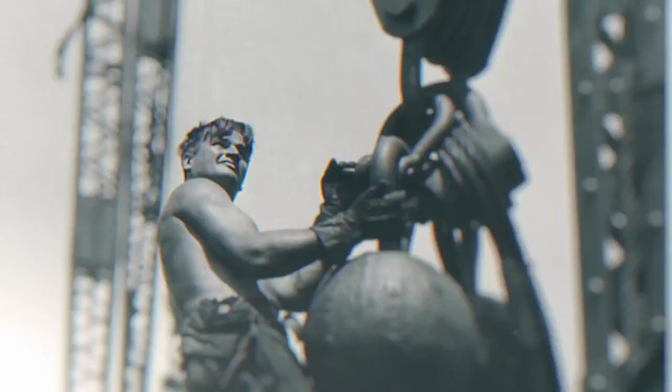Like giant exclamation marks, skyscrapers punctuate the story of our urban development. People always want to reach—there's something heavenly about it, and people have wanted to race for height forever. Developed by the pioneers of architecture in the late 19th century, they were, at the time, the equivalent of our going to the moon. These magnificently designed tower giants urbanized some of the greatest cities in the world. It's about defying gravity and leaving a sign of humanity. From Chicago to London, from Tokyo to Dubai, skyscrapers have and continue to define our contemporary way of life.

The 1970s was an era of pivotal change in the United States. After a decade of optimism and prosperity, the country was now suffering through an economic crisis. The economy was in recession, and cities like New York saw a decline in manufacturing, and with it, fewer industrial jobs. By 1974, 500,000 people were out of work, and the city was on the verge of bankruptcy. Demographics were also shifting. With crime rates at an all-time high, middle-class families began to abandon the city.

But out of the ashes rose the World Trade Center. Spearheaded by David Rockefeller, the urban renewal project was intended to help revitalize Lower Manhattan. The World Trade Center site and the Twin Towers, ironically, was really the first time where a government agency participated in a large-scale skyscraper development project. The idea was to give a sort of a shot in the arm, because they had this large site and were interested in projecting New York City on the world stage. The Port Authority decided to build the Twin Towers, the world's largest buildings at the time.

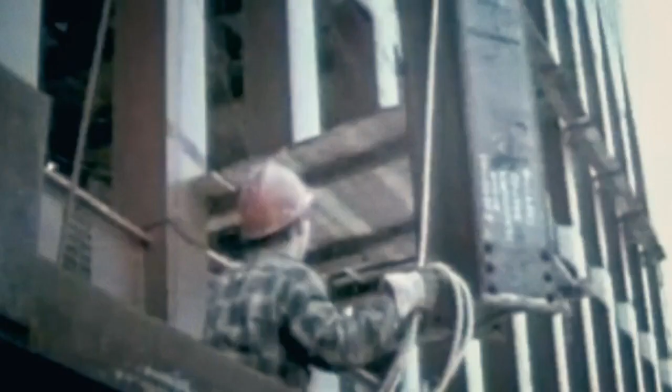At 1,368 feet and 1,362 feet respectively, the World Trade Center assumed the title as the tallest buildings in the world.

The World Trade Center site is very large, and many small mom-and-pop type shops were displaced, so that whole neighborhood, which was a bit gritty but still vibrant, was destroyed. That caused a lot of controversy. Many New Yorkers, as is typical for new iconic projects, thought those two buildings were pretty ugly. They didn't think it looked like a building. It didn't have a crown. It didn't have the typical physique of a skyscraper. The fact that there were two of them made it marginally better, but not great.

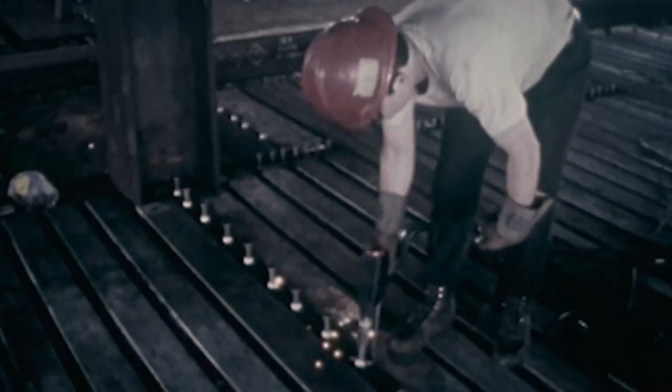Even though the World Trade Center received criticism for its generic design and brutal scale, the towers contained many innovative structural engineering features. It was one of the world's first tall buildings to use what's called a framed tube system. A lot of the structures placed on the outside of the building were columns in very close proximity to each other, just a couple of meters apart, all pushed to the edge of the building. What that did is it made the floor plate open plan, allowing businesses at the time to thrive.

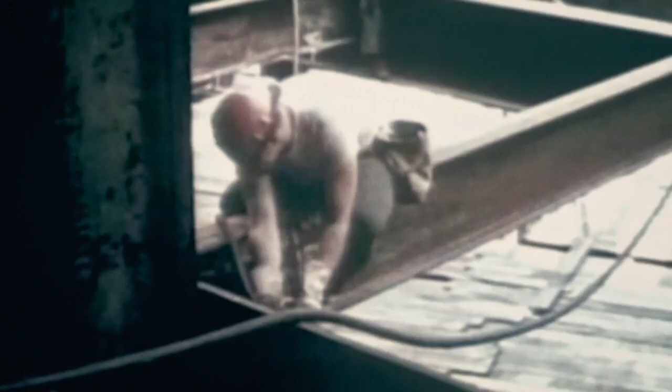The other innovation of the World Trade Center was the pressure equalized facade—a facade able to control the weather and keep it outside of the building by equalizing wind pressure inside the depth of the facade system. It's a very clever approach that controls waterproofing by opening gaps in the facade. It was a test bed for the first time of two very important aspects: wind engineering and pressure equalization of facades, both happening in that one building.

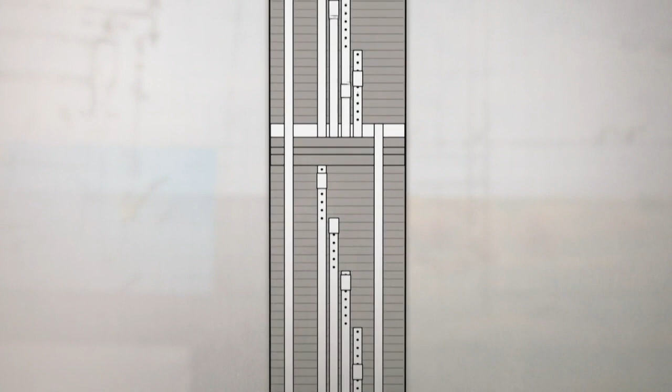The building was one of the first to use what's called a sky lobby elevator system. Occupants would travel on shuttle elevators to an open floor, and from there move to local elevators which serve individual floors. That made the whole vertical transportation process much more efficient, and it meant the core was much smaller.

New York has always embraced these vast projects with a mix of disapproval and approval at the same time. They were a little bit like aliens in the fabric of downtown, and they seemed to tip the island a little bit over to the west side. They didn't participate in the shaping of the skyline. As the need to build taller and stronger was increasing, the relationship between architect and engineer was changing.

From conception to completion, it takes a village to build a skyscraper. There was a huge number of people involved in designing a skyscraper—it's a very complex machine. You may have a lead consultant that can offer all the services, or an architect that will bring an engineering team, so you may get 20 or 30 different stakeholders within the design team. An architect doesn't need to know as much about structures as a structural engineer does, but needs some understanding so they can design better and communicate with the structural engineer better, and vice versa. The job as a skyscraper architect is to listen to everyone, synthesize what they are telling you, and channel that into the design.

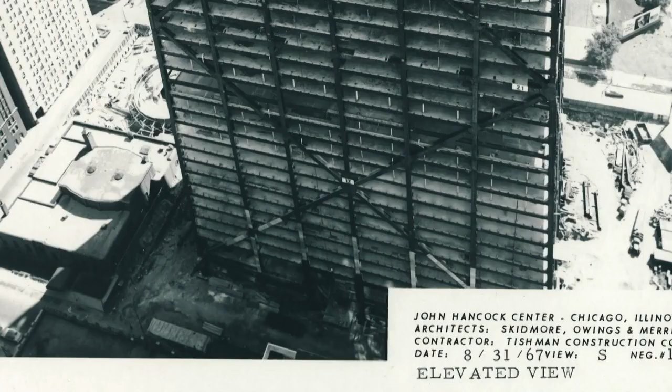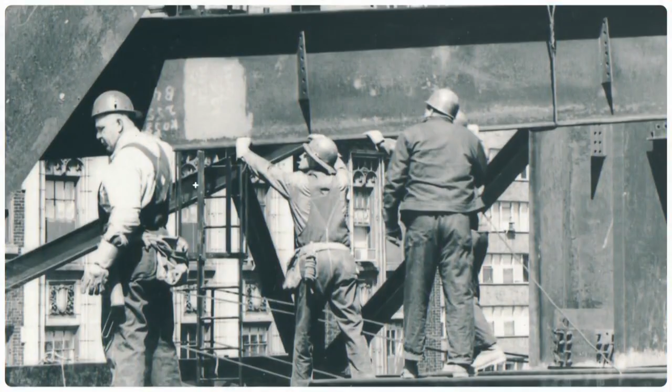We do architecture with a capital A and engineering with a capital E. It's pretty rare, and the three people, Skidmore, Owings, and Merrill, have long since passed away. So you have a bunch of people, architects who like working with engineers who like working with architects, and who are not so driven as to get their name on the door, but are driven.

Bruce Graham and Fazlur Khan were SOM's dream team in the late 1960s, early 70s. Their greatest collaboration was the 110-story Sears Tower.

In the 1970s, you had the kind of competition between the Sears Tower, the Hancock Tower, the World Trade Center, the second boom of the American skyscraper, with these latest generation of towers competing to be the tallest in the world.

Chicago has always been a pragmatic city, fundamentally, and I think architects in Chicago have maintained a very pragmatic approach. While designing the Sears Tower, Graham and Khan determined that the framing structure traditionally used to construct tall buildings was inefficient. So they opted to devise their own.

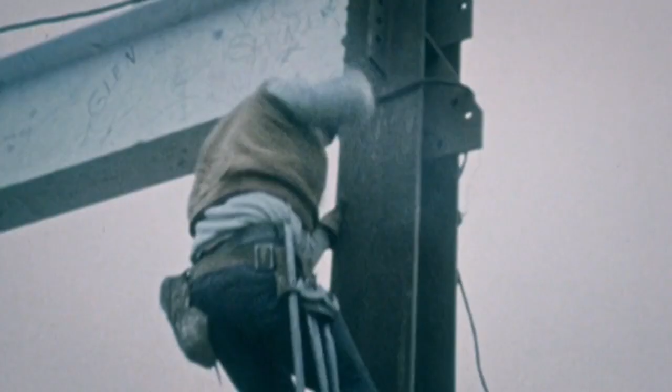The bundled tube system increased buildings' overall stability, eliminated internal wind braces, and maximized usable interior space. It consisted of numerous narrow cylinders bundled together to form a thicker, more substantial structure.

Sears Tower pushed engineering and aesthetic expression of the tall building in certain directions, and certainly with structural expressionism, the idea of expressing the structure on the exterior of the building.

I have 4 pieces here and 4 pieces here, same size and same length. So if I hang this from this, you see that it bends quite a bit, right? In this case, I have the same 4 pieces of wood, but they're glued at the end, so they act together like a bundled tube. Now you see that it bends a lot less than it did before. What we're getting here is one structural member which is considerably stronger and stiffer.

As you go up, you cut off some of these tubes because it's not needed anymore. As the building goes up, it becomes smaller in footprint. But everywhere that these tubes touch one another, they're interacting with one another, they're locked to each other, and therefore there's no slippage.

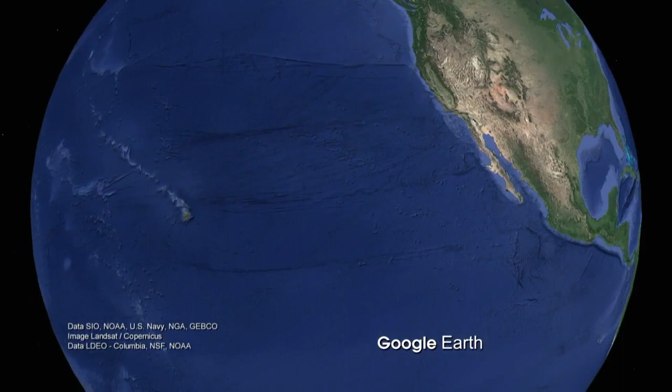As skyscrapers reached new heights in the United States, another country was asserting themselves into the race. Looking to share his groundbreaking structural engineering concept down under, Fazlur Khan headed to Australia, hoping to make high-rise history.

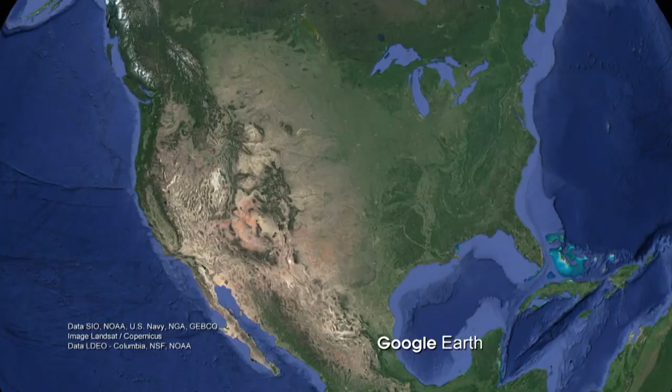As the second largest city in Australia, Melbourne has repeatedly taken a backseat to Sydney in terms of population and location. But by the 1970s, this cultural capital experienced a sudden skyscraper boom.

Designed by Yuncken Freeman Architects, along with the assistance of structural engineer Fazlur Khan, the elegant 41-story BHP house on William Street became Melbourne's first skyscraper to surpass 500 feet.

That building was an icon for the corporation of BHP in Australia, but was also a test bed for the belt and outrigger truss systems, which are used worldwide today to stabilize buildings against the wind.

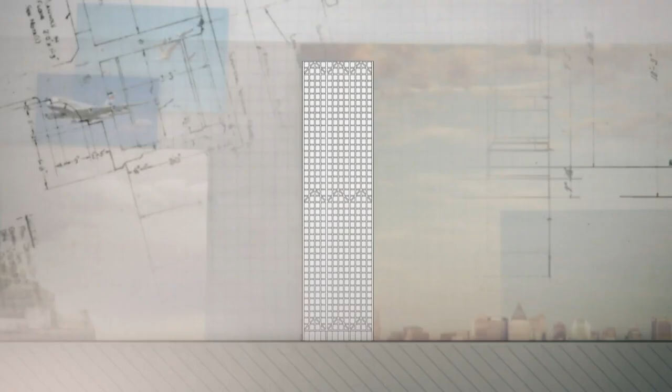So the outrigger system consists of huge super columns on the perimeter of the building with a truss, or normally a large structure that links these two together. Where you have the central spine, and then you reach out at certain levels to grab the perimeter to resist the overturning force.

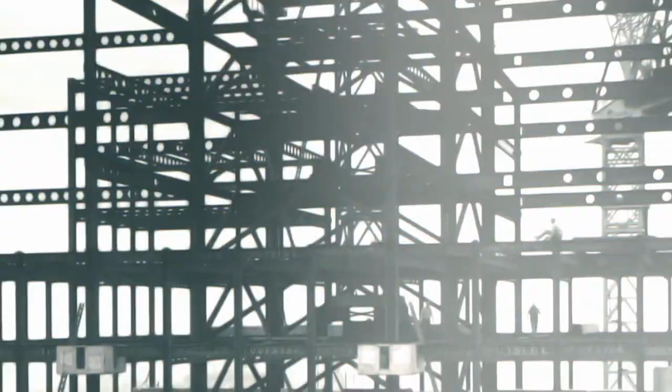The core outrigger system became very popular because once you have that, you can have the facade really open. You can put a lot of glass there. The architects can articulate the facade in whatever way they want. And the concept is very simple.

Due to an array of innovative structural design components, the BHP house stood apart from other skyscrapers of its time. The building generated its own electricity using natural gas.

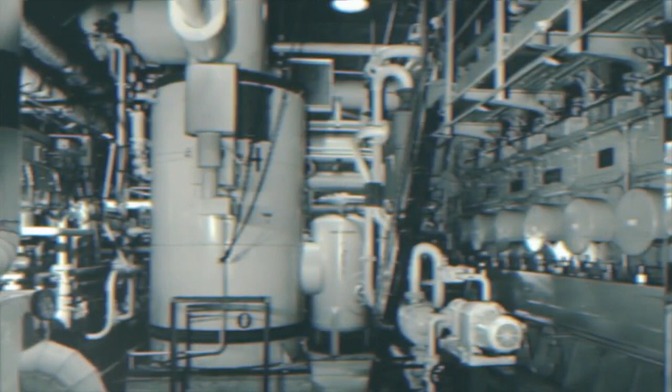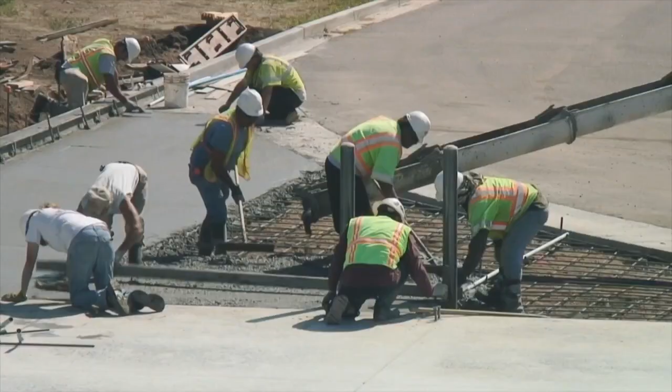New techniques using steel and concrete redefined the building's structural design. Unlike traditional layouts, the open floor plan allowed for more use of the internal space, and the sheer glazed exterior curtain walls increased the building's overall efficiency. It was clear that Australia was breaking away from traditional architecture and influencing the future of engineering.

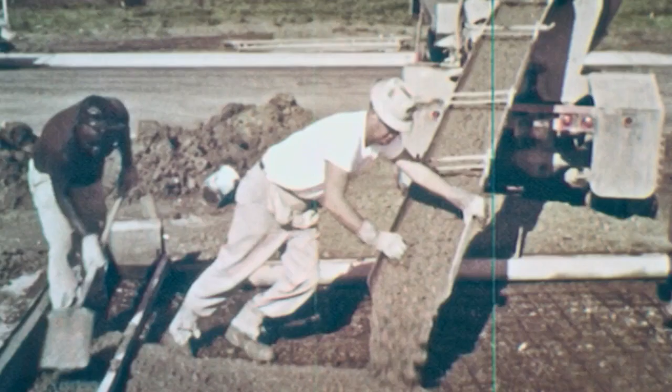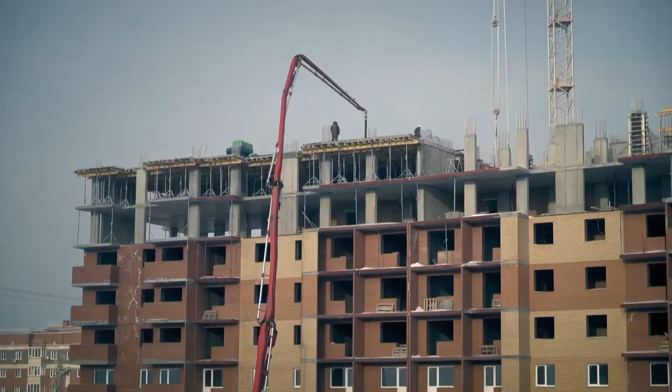Australia became so confident building with concrete that it even developed its own techniques, unique from the rest of the world. It led the world sometimes in concrete construction from the 60s through the 70s. For example, the jump form technique of construction was patented in Melbourne in the mid-70s, and that is the same technology used to build the Burj Khalifa in Dubai.

Back in the United States, one of the nation's oldest cities, Boston, was on the verge of its own architectural boom. Looking to distinguish itself from other cities across the country, Boston was eager to create a significant architectural landmark of its own.

Architect Henry N. Cobb and the design firm were assigned the task of creating the John Hancock Tower. Their challenge: to design a modern skyscraper that wouldn't overshadow the historical landmarks that surrounded it. Their ingenious solution? Glass.

What the architect, I.M. Pei, tried to do was have a facade that was double glazed, with curtain wall panels stretching from floor to floor. To make the face of the tower appear smaller, the design team used reflective double-layered mirror glass. The material allowed the lower levels of the tower to reflect the buildings in the surrounding area, allowing the rest of the tower to seemingly disappear into the sky.

It was a fairly large piece of glass, double glazed, quite different from what we have today. The spacer between the double glazed unit was soldered to one side of the glass, and because the glass was reflective, it had a reflective coating that was also soldered through the spacer. It was a new material, and this question of risk comes with new technologies.

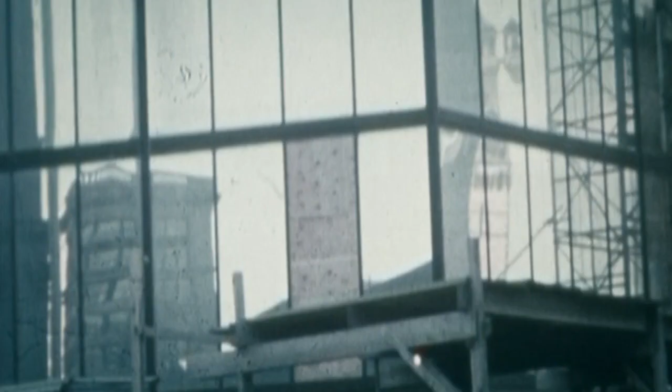Now every painful pane is being replaced by CDX grade plywood, worth about $126,000. Eventually, a different type of glass will replace the plywood at a cost of more than $7 million.

Engineering is what it is. It's actually problem solving in uncertain conditions. Therefore, it is inevitable that occasionally it will jump out and bite you.

From its development, Citicorp Center, now the Citigroup Center, was an engineering challenge. When planning for the skyscraper began in the early 1970s, the northwest corner of the building site was occupied by St. Peter's Church, one of the city's historical landmarks. Luckily, the church allowed Citicorp to build its skyscraper under one condition: a new church would have to be built on the same corner, with no connection to the building.

Since the city was suffering economically, most local architects were fearful that designing a building of this magnitude was too big of a risk. But architect Hugh Stubbins was willing to roll the dice. His intention for the Citicorp Center was as righteous as the church that owned the land.

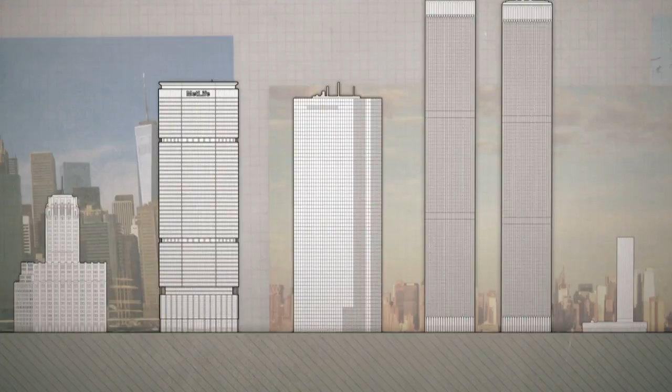The center was conceived on the back of a paper napkin, the architect's pre-digital sketch pad. The architect Hugh Stubbins and the engineer William LeMessurier came up with this idea of four legs which lift the building up above the church, and those legs are not in the corners where it would be ideal, they're in the center of the building, which provides a very unique ground floor experience.

LeMessurier designed a system of stacked load-bearing braces in the form of inverted chevrons. Each chevron would redirect the loads to the center, then downward into the ground through the columns.

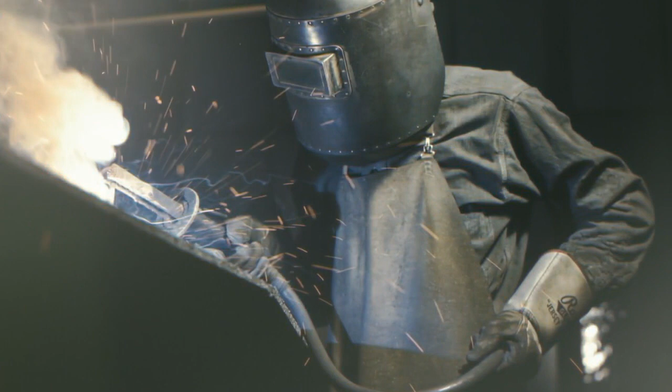Unfortunately, the building's chevron pattern of structural bracing did not account for one major design challenge: the wind, an issue brought to LeMessurier's attention a year after construction. He had a moral quandary about what to do, because his reputation was on the line on one hand, but the safety of the building was on the line on the other. He approached the owner of the building, and at night they re-welded all the joints in the chevrons. So at night, you could see the welding torches repairing and improving the building to increase its structural performance. Working throughout the night, emergency construction crews took immediate action to rule out any future catastrophic failures. It really is a story of what can happen if we change a bolt and a welded plate, the importance of detail in the structural performance of a tall building.

It was one of the first towers that was still modernist in its image, but it had a rake top, not a flat top. But it wasn't the only one trying to do that. From the 70s, we start to see a shift from the flat tops, and perhaps the architect that publicized this new approach in tall buildings was Philip Johnson.

Compared to the 70s, the 1980s was a time of restrained optimism in New York City. Even though businesses were booming, the decade was described as a colorful conundrum of haves and have-nots, and set the tone for the rise of a new era of architecture: deconstructivism.

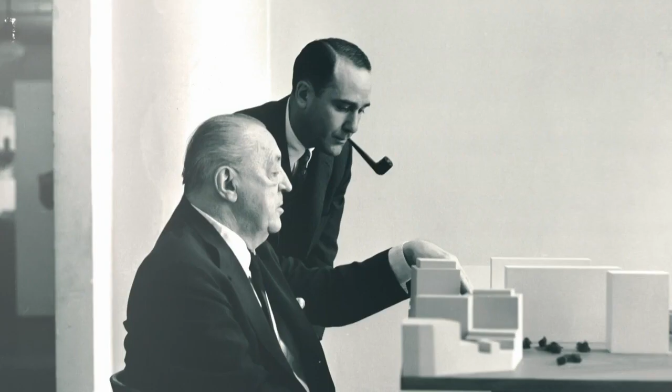As one of the most influential American architects of the time, Philip Johnson embraced both international and postmodern architecture, mixing his unique eye for form with a minimalistic aesthetic. Johnson yearned for a return to the golden age of the skyscraper. It was his famous motto: I'd rather be interesting than modernist or monotonous. In the 20s, they were building these beautiful buildings, Art Deco. But then, under the influence of Gropius and Mies van der Rohe, they started to build just boxes.

Modern buildings were seen as becoming too anonymous, too ubiquitous. The glass box skyscraper became developed over and over again. It lost some of that purity and luster that it had originally. This laid the groundwork for postmodernism in many cities and countries too: an appreciation of older buildings, an appreciation of masonry as opposed to steel and glass, an appreciation of ornament, and trying to create ornament out of new materials even.

Ultimately, tall buildings were going back to the origins of the skyscrapers in New York, with the spires and the need to advertise their space in order to find enough tenants. Everything old was new again. Postmodernism enabled architects to look back at historical styles, to reconsider them, and to re-employ them, enabling buildings once again to have scale, which had been ignored.

Rising from a sea of glass in Midtown Manhattan, the building's impact on the history of postmodernism and Johnson's legacy was a huge win for New York City and a new age of architecture. The AT&T Tower is perhaps the best example of a postmodern skyscraper, a rejection of the functionality and restraint of the glass boxes that came in the decades beforehand. Despite prolonged criticism, Johnson's AT&T building proved to the world that an evolutionary phase of architecture had officially arrived and was here to stay.

In a word, American architect Philip Johnson's AT&T building was monumental. Standing 647 feet tall, this 37-story high-rise skyscraper located on Madison Avenue immediately stirred up its fair share of controversy. It certainly became a symbol of postmodern high-rises in the 1980s, with its Chippendale top, as it was derided in some ways, but also praised in many ways. The building also referenced historic forms from the Romanesque and Florentine Renaissance. The entrance was modeled on Brunelleschi's Pazzi Chapel colonnade.

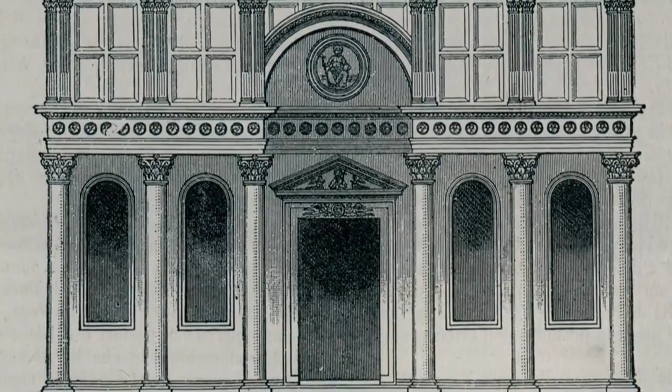But for me, its best feature is its generous public entrance, a 7-story archway, a kind of heroic entrance to the building at ground level, clad in glass and ceramics. It's beautiful.

Postmodernism is like the third rail. Every time you bring it up, people react to it in different ways. I always say there are two ways to look at postmodernism: one with a capital P, the other with a small p. One is what follows after modernism, the other is a style. And the style is problematic because appropriation and exaggeration of classical ornamentation, just applying it to everything, was a big problem in that style.

Structurally, the AT&T building's design was inherently modern, supported by a tubular frame, its columns connected with trusses at the top and bottom. But instead of using modernism's customary glass curtain walls, the building's steel body was covered in pink granite.

While the AT&T building remained respectful to the other buildings on the block, Johnson's next postmodernist monolith showcased a daring shift from the grid.

Located on 53rd at 3rd, the Lipstick Building was quickly dubbed an oval building in a square environment, due in part to the unique way its soaring setbacks telescoped out of the skyscraper's curved shaft. There's no denying Johnson created a building that attracted attention.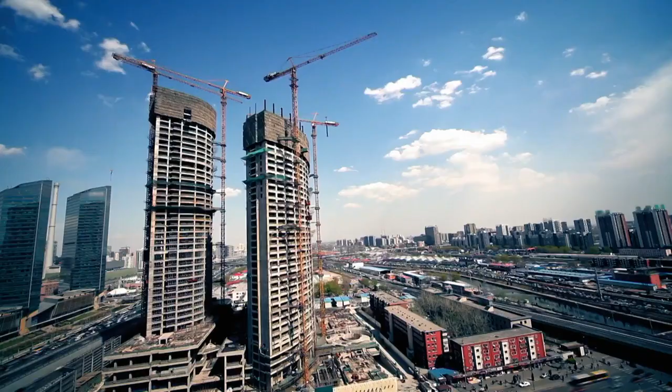The fate of the skyscraper industry and its ties to the cycles of big business have always been a subject of speculation. But no matter the location or the decade, some economists believed the height of tall buildings acted like economic measurements, predicting either booms or busts.

The Skyscraper Index was developed by an analyst called Andrew Lawrence, who convened a study where he created a very strong correlation between the completion of the world's tallest building and widespread financial collapse.

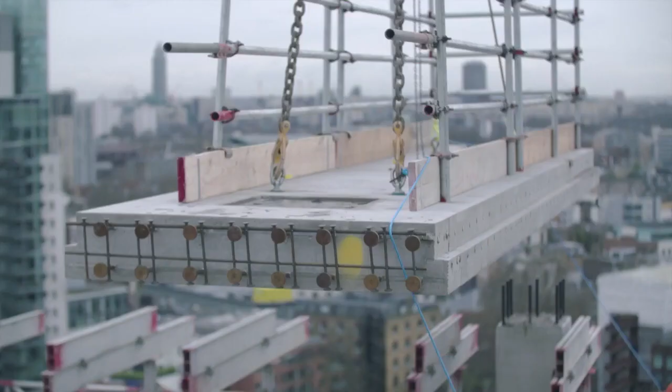For example, the Chrysler Building and the Empire State Building in New York coincided with the Great Depression. Completion of the Petronas Towers in Kuala Lumpur coincided with the Asian financial crisis, and various other examples as well. He drew the conclusion that when the world's tallest buildings are completed, we should head for the hills. Okay, it's very easy for us to create patterns that don't exist.

To a certain degree, they are hostages to fortune. You might start a building in a boom and finish it in a bust, or vice versa. So they are more difficult to predict than something simpler and shorter in program.

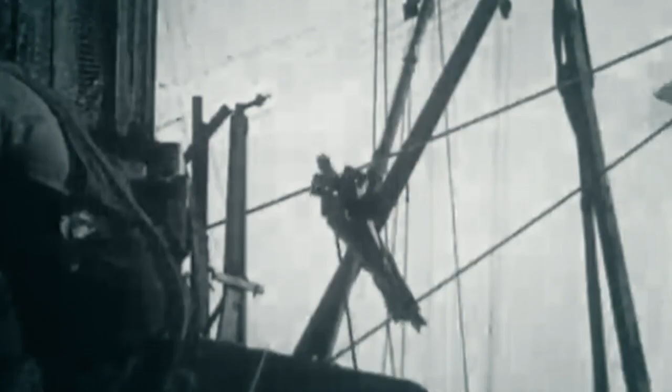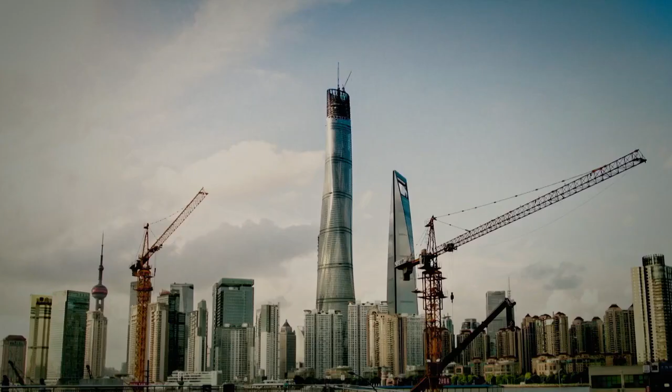If you look over time, the tallest buildings are always at the end of the bubble. Everybody's really interested in real estate, they think prices are going to continue to go up forever. So you build a really tall building, and by the time you finish, the market has turned. That's all about these economic cycles, because people don't go to build tall until they're feeling that heady environment in the economy, and then eventually it turns.

So the job of a real estate developer is to try to make sure they understand where they are in that cycle. You got to catch it right.

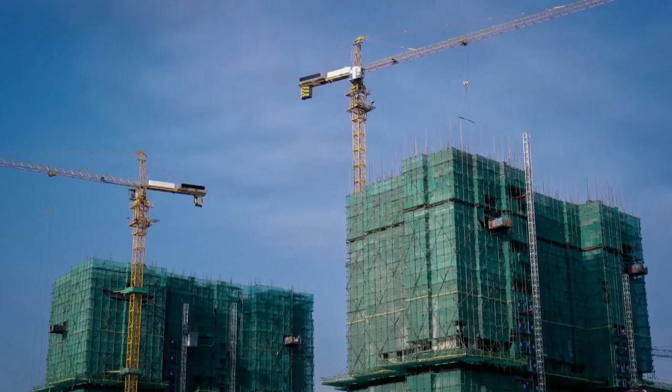Whether consequential or coincidental, skyscrapers have always provided a way to stimulate economic growth and utilize new technology. And while the function of skyscrapers remained true to their cause, in the 80s and early 90s, their form continued to surprise and inspire worldwide.

The story about the skyscraper then is about the movement away from the United States. Those cities are actually competing on a global stage, and they use these landmark buildings to signify their prosperity and progress. There's no doubt about that.

These buildings define a kind of center, a boast of the modernity of that place and its suitability for business. You come to a city and you see these edifices and you're impressed, rather than this landscape of low rise.

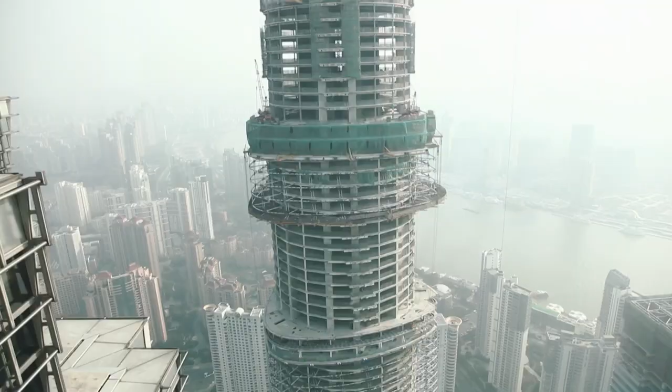First high-end companies will move in, and also we bring in a lot of modernization with all the infrastructure associated with that, and all the jobs that is created, and also really bring the existing city into a next level of modernization.

Hong Kong, 100 years ago a rocky, inhospitable island, is today one of the world's busiest and most crowded cities. By the mid-80s, Hong Kong was already bursting at the seams. Despite a decade of relatively slow growth, it was still one of the most heavily populated cities on Earth.

An excellent example of a city where the towers are integrated into the infrastructure is Hong Kong. You've got one of the world's best mass rapid transit systems, points of density and towers built on and around stations. What that means is most people live within a 500-meter, an 800-meter walk of a transit stop.

While other architects across Asia were concerned that too many skyscrapers might affect the spiritual context of an urban environment, architects in Hong Kong were focused on how they could add more to its skyline.

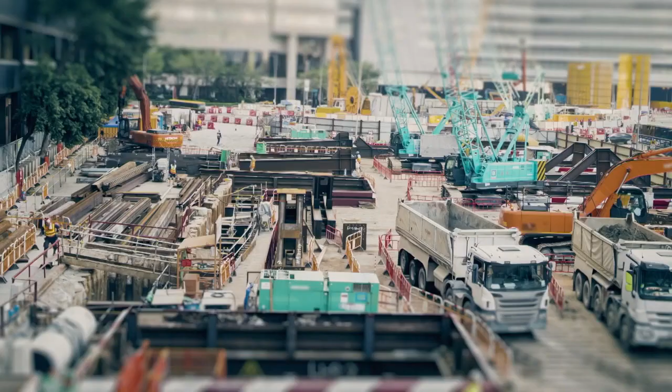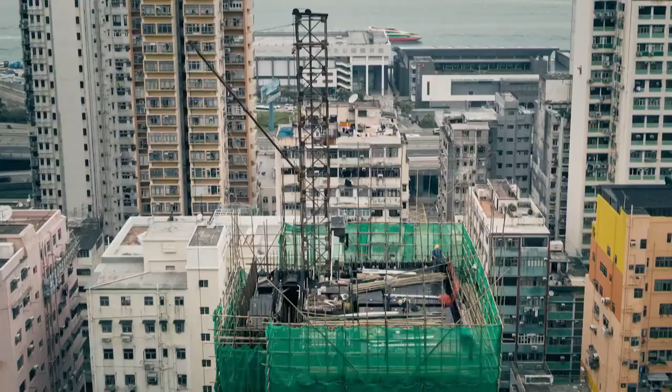I did a lot of work in Hong Kong, and Hong Kong is just an adrenaline rush of how on earth we're going to build in the locations we're building, and certainly in terms of those high density areas, literally building 2 or 3 meters next door to another building. So that was pretty challenging. But I think just the speed of construction and how you go from the drawing side to the construction side, that was the huge challenge, because getting buildings up, getting people in was the key driver for developers.

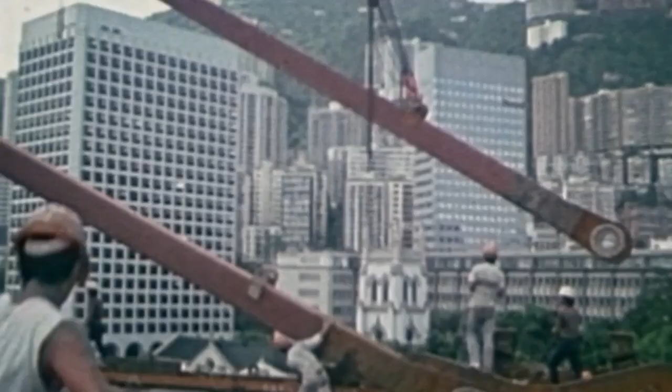I've never seen anything like it. Hong Kong was determined to become the #1 city in the world to do business by providing a bridge between the East and West. The world's most expensive new office building.

It cost about £600 million, and even the critics applaud the revolutionary design, which allows the maximum space on a confined site. Norman Foster's ultra-modern HSBC building dominated the shores of Hong Kong's harbor in the mid-1980s. The building was seen as a major architectural triumph by incorporating the ancient Chinese practice of feng shui without compromising on cutting-edge design.

HSBC questioned at the most fundamental level all the high-rise buildings that had gone before. The high-rise building before HSBC had been a central core with a ribbon of space around that - the central core, escape stairs, elevators, washrooms, mechanical plant.

So by taking that and fragmenting it, breaking it down into smaller pieces, and then creating lofts and putting those smaller pieces at the end, you could see through the space, unbroken space. You could see the mountains at the back, the water at the front, Statue Square.

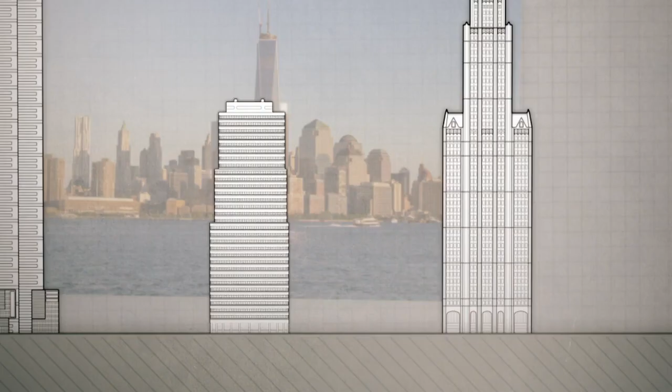Inspired by the relationship between mountain and water, the 12-story glass and mirror atrium symbolized the bank's ability to hold on to money.

The position of the escalators helped to channel energy into the skyscraper, and the building's open plan encouraged communication between its occupants. The key challenges are connectivity with the workmates.

If you've got an office which is split over 3 or 4 floors and the only way to commute between those floors is the lift, you lose a lot of opportunity for interchange of ideas and for cross-pollination. Creativity is all about communication. So if I can see you and I don't have a big wall in between you and me, then we're going to have a more enjoyable exchange.

The absence of the building's 4th floor was intended to create space and a sense of community. The architectural decision was intentionally made to align with local tradition.

Hong Kong, it's really tight. You have Statue Square. Everybody's bursting for space. It's so intense, the incredible energy, the density. So the opportunity to lift that tall tower above the ground plane, extend Statue Square through underneath the building so it becomes a major civic space.

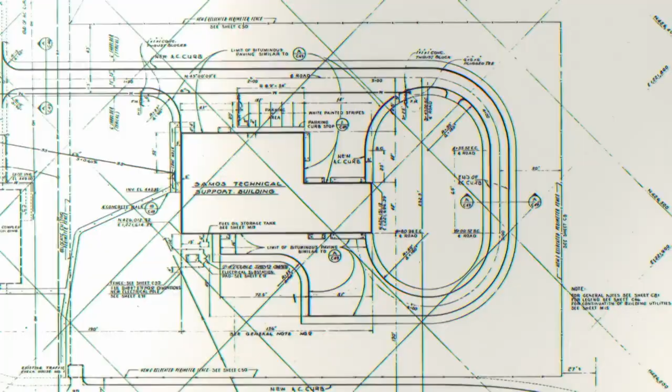The design process is a complicated one. The site, the budget, the function, and the overall aesthetic are key factors that need to be taken into consideration.

Design should be an answer to a problem, so we hold ourselves to the task. You can't design a building in 3 moves - it's too complicated. As architects, you advocate. You don't have the power to say it should be like this, but what if this, and these are the reasons why, and there's a good argument, then that becomes something which is bonded and shared and finally realized.

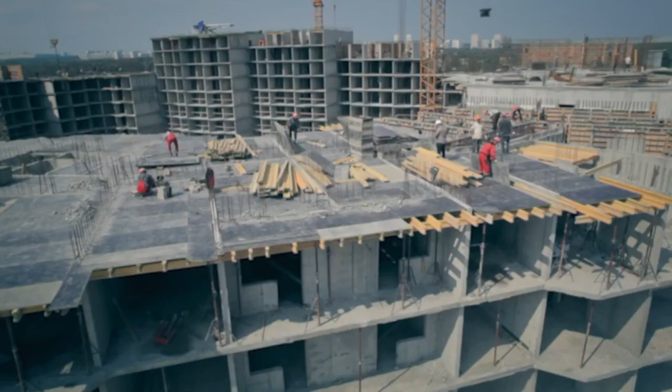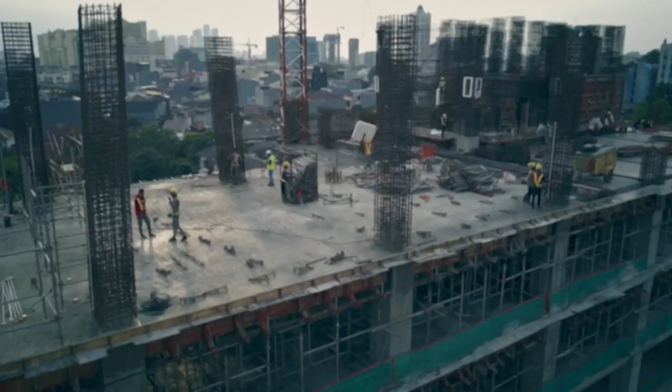Architects are always looking for something new to do, but they also want to know their options. A lot of architects actually appreciate a few constraints. The way we work with architects is we try to guide them into solutions that'll meet the goals that they have, and of course the developer has goals too. It requires me as the designer, in a way, to check the ego or the preconceptions and allow for everyone to have a voice in the design, because as we know, innovation is occurring at the intersection between disciplines.

So it's about bringing in the practicalities to say, how can we meet that, make it practical, make it buildable, make it affordable for the client to build at the end of the day. It's not an equation where you put the numbers in the right sequence and get a fixed answer. It has to be designed so that it means something.

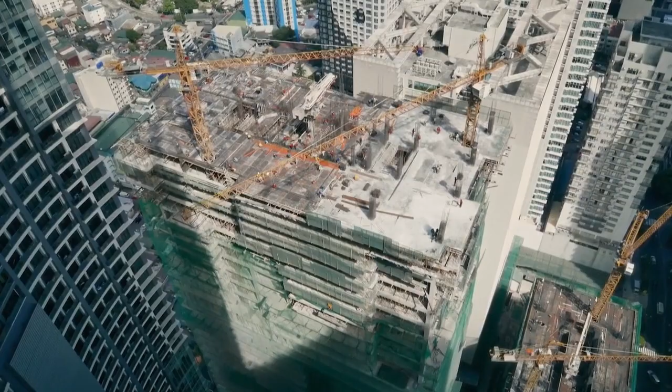As the 80s turned into the 90s, an entirely new age for architecture began to establish roots. Unlike traditional practices, where functionality and design controlled how a building was created, now the priority to adopt sustainable initiatives became a crucial component in building construction.

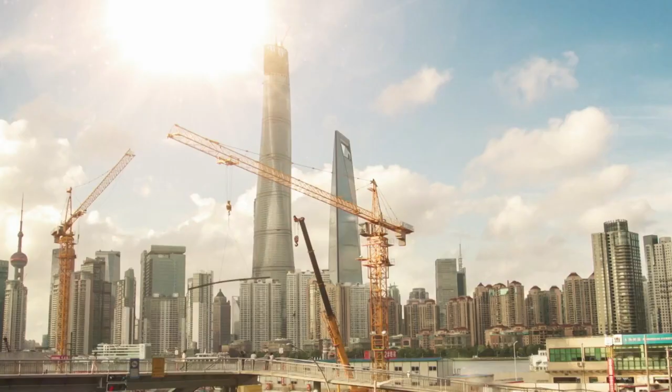The 1990s ushered in a new wave of change. Advancements in technology drastically influenced the way in which people lived and communicated. In terms of architecture, one very vital truth became alarmingly clear: in order to preserve a building's life cycle, the future was sustainability.

Germany established itself as a pioneer in environmental sustainability. Greening the economy was seen as both a social and political imperative, given the nation's high population and scarcity of natural resources. Taxing energy sourced from fossil fuels encouraged the development of alternative technologies. Green roofs and facades and permeable pavements were just two innovations German planners embraced as they strived to create an energy-neutral future.

I think some of the best tall buildings in Europe are in Germany, with double skin walls, with natural ventilation strategies. One of the best towers that has ever been built was Norman Foster's 1997 Commerzbank.

For many years, the Commerzbank building in Frankfurt was the tallest skyscraper in Europe. Commerzbank, at its time, became the first ecological tall building, the first building to be working with nature, to be breathing.

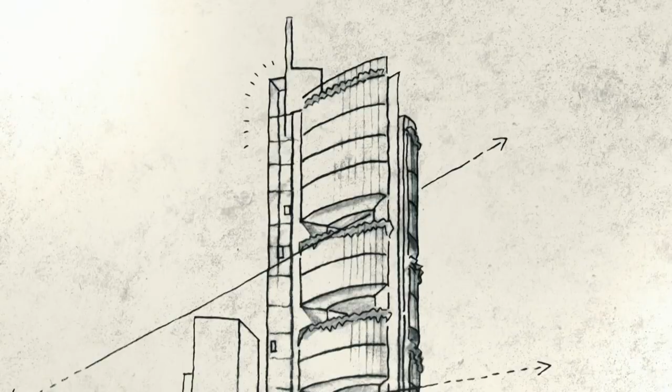The building was positioned in a way that took advantage of the sun and wind, providing natural ventilation and light to every office in the 53-story tower.

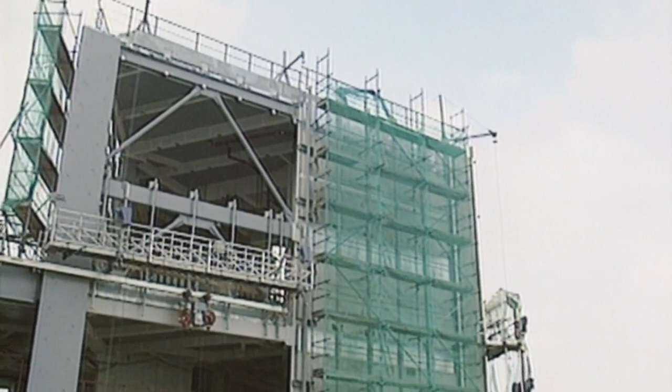To more effectively utilize the climate, lead architect Norman Foster and his team developed the Klimafasade, a custom-made double-skinned envelope system that housed special motorized Venetian blinds.

At that time, as we saw it, for some 65% of the time, the climate would be such that you wouldn't need to heat or cool, and you could have the freshness of contact with the air outside.

There were two kinds of working space: those on the outside of the building looking out to the skyline, and those that looked into the gardens. In no time at all, the most popular spaces became those that looked onto the garden. I think here there's a social dimension coming in.

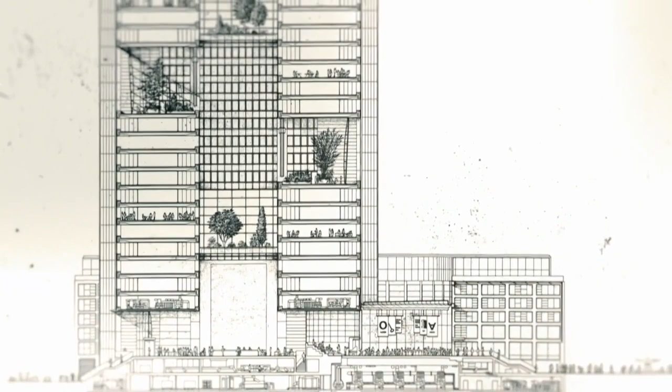It took another 10 to 15 years for another building to surpass what it did in terms of its commitment to communal space within the building. No matter where you work in that building, you have a direct connection to a sky garden, and there are a series of sky gardens that step up around the building.

It comes out of the street pattern with relatively low buildings. Those are replicated, and then you enter, you ascend, and it's a shared space - a restaurant, public. It's shared by the community of which they're a part, with an awareness that there's the private world in the tower, but that's in a very public domain, so somehow that fusion of the two is critical.

Without compromising the tall building aesthetic, Norman Foster completely reinvented the skyscraper, with every detail intentionally designed to connect and engage the community and to save or produce energy. The Commerzbank Tower set the tone for building to the sky in the 21st century.

My colleague and I have contended that we're possibly into a fifth skyscraper age, which is more specifically performance-driven. We see this particularly with sustainability and the need for more environmentally and ecologically sensitive buildings.

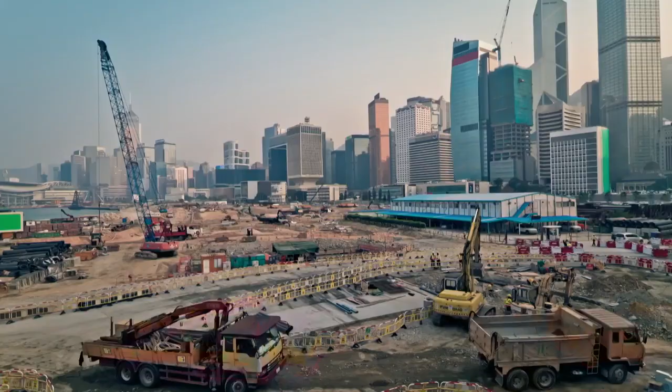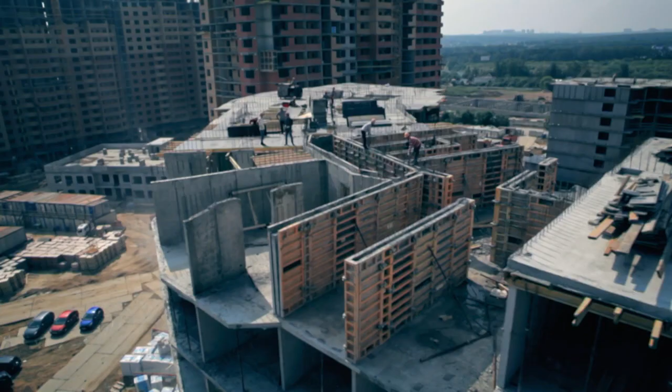More than half of a building's energy goes into its construction, depending on where it's located. That's because there's a lot of heat required to melt aluminum, for example, or how far those materials have to travel to get to the job site, because the trucks or the trains carrying those materials also consume energy.

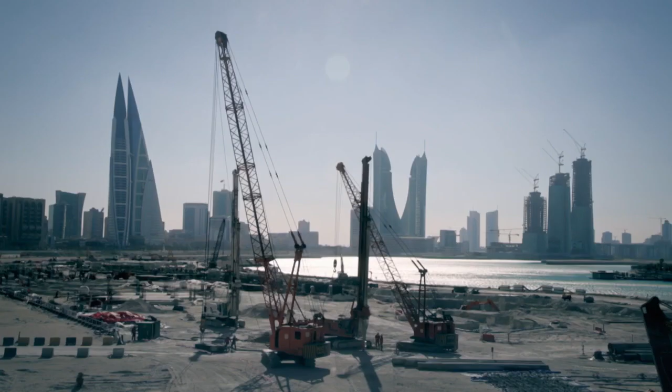Sustainability is a global requirement. It's not a trend, it's a necessity. For our continued survival on this planet, it's not enough for a building to just do the best it can by itself. The revolution that's happened has to do with the sustainable imperative that buildings have to do better in energy performance. We're constantly looking for that magic moment where the envelope is as thin as possible but performs as if it's not there.